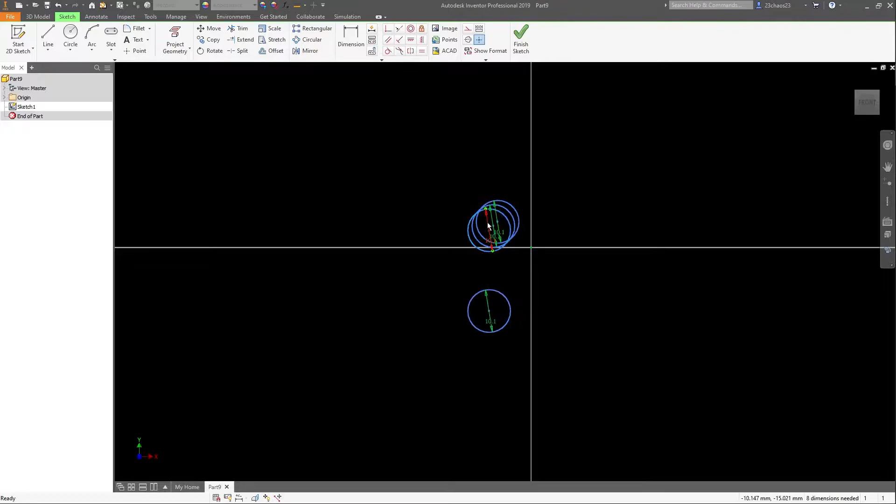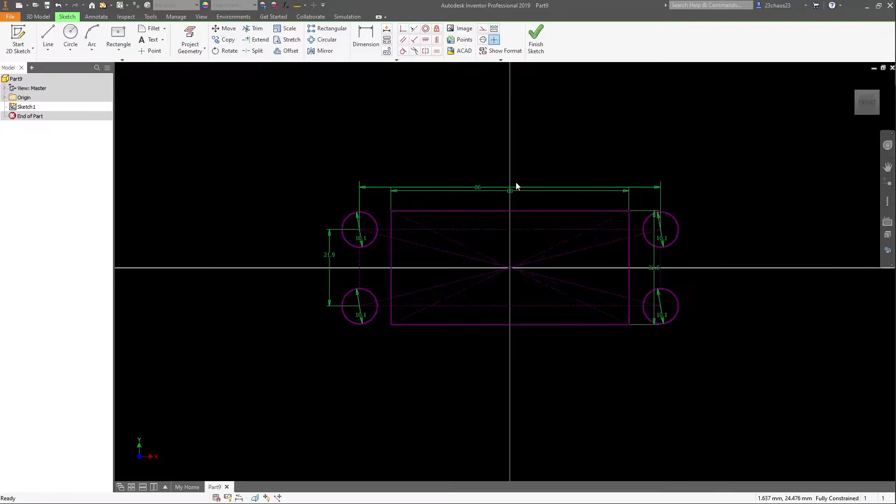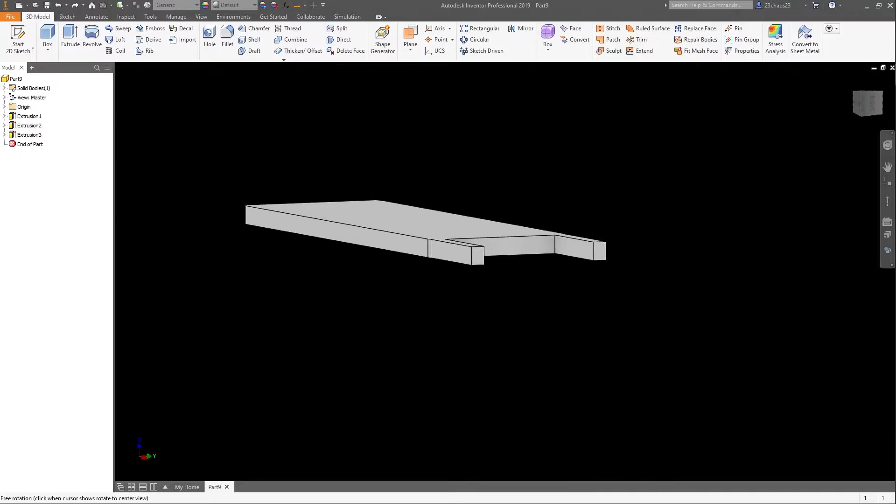And there you go. I'm just going to keep it simple for now. I want to test print it first, get a test print, put the magnets in it, fit it, see how it fits, and then I can start getting more defined measurements off of that once it's in place on the phone. Because, like I mentioned, the phone just has a really funky backplate shape. It's not flat, and it's got all sorts of angles and weird shapes.

So just getting it to align up inside this groove on this flat part of the backplate is probably the most important thing first. And then from having it on there with the magnets, I can then measure from that to the edges around the USB Type-C area. I've got to make spaces for the buttons and stuff.

You saw there I was trying to make those extension side pieces and everything, and then I remembered, oh shit, all the buttons and everything are in the way. So I should probably wait on doing that until I have something that's attached to the phone, and I can get measurements from that then more accurately.

In other news, some post arrived today. Specifically, this bad boy. This is the 500 kilogram tensile or strain gauge that I ordered for the tensile testing machine, which is sitting over there. I've been waiting for this. I'm still waiting for a couple of other things to get measurements off of these things so that I can design the mounts and all the rest of the stuff that I have to print. That's going to be part of that machine.